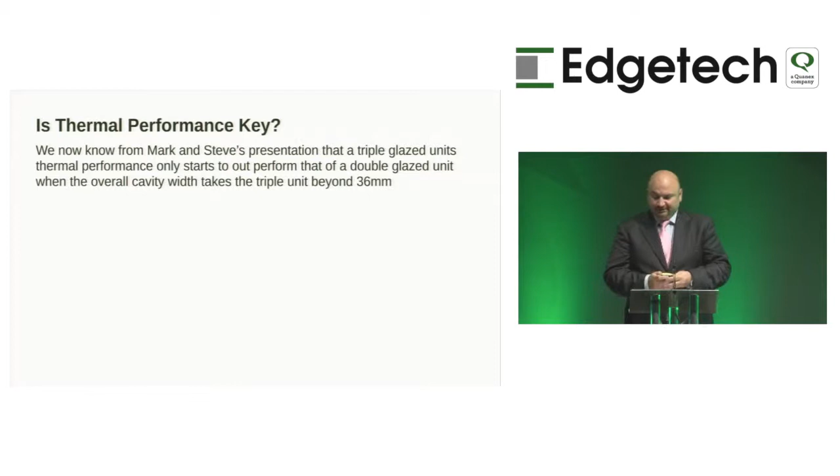Balance in the window industry, I've never heard of it. So is thermal performance key? We now know from Mark and Steve's presentation that a triple glazed unit's thermal performance only starts to outperform that of a double glazed unit when the overall cavity width takes the triple unit beyond 36mm. Apologies to those guys because I've nicked their slides.

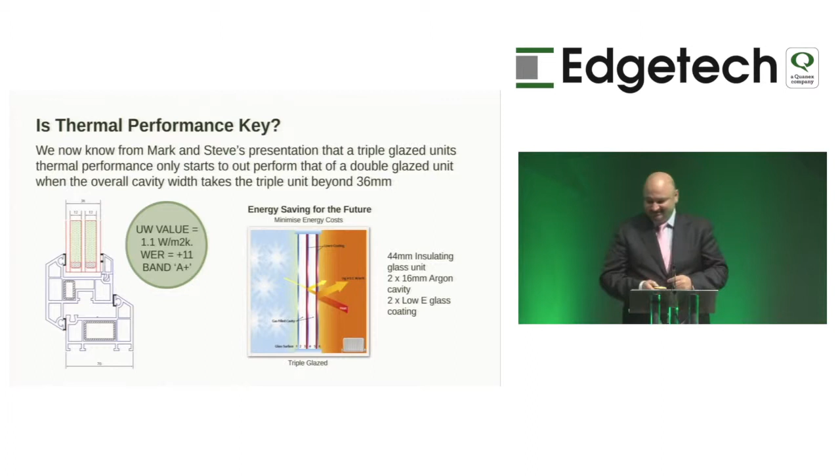Preparation - what do manufacturers of windows have to face when considering triple glazed units? For triple glazed units less than 36mm, virtually no extra consideration has to be given to the manufacturing of windows, frames and sashes. However, there will be some consistent themes that you've heard today, which I'll go through in my presentation, and I'm sure Steve will pick up on when we consider some of the implications.

For triple glazed units more than 36mm, at this point 70mm suites, as Mark alluded to, become impractical to hold a 36mm plus triple glazed unit due to space constraints and the placement of the glazing beads.

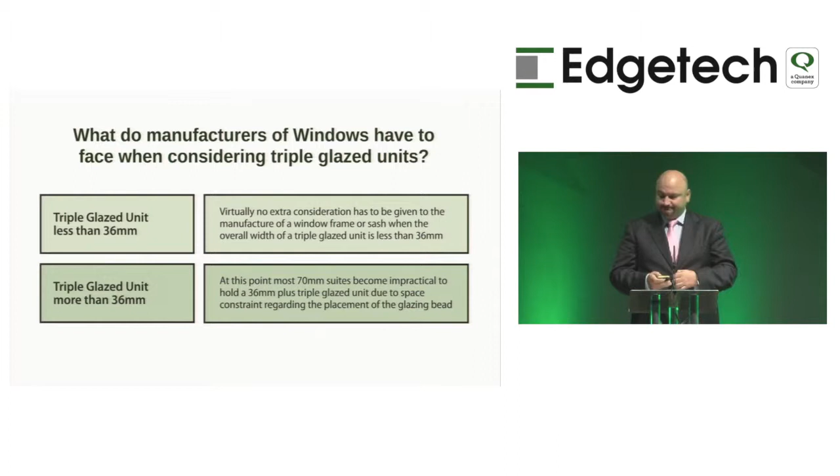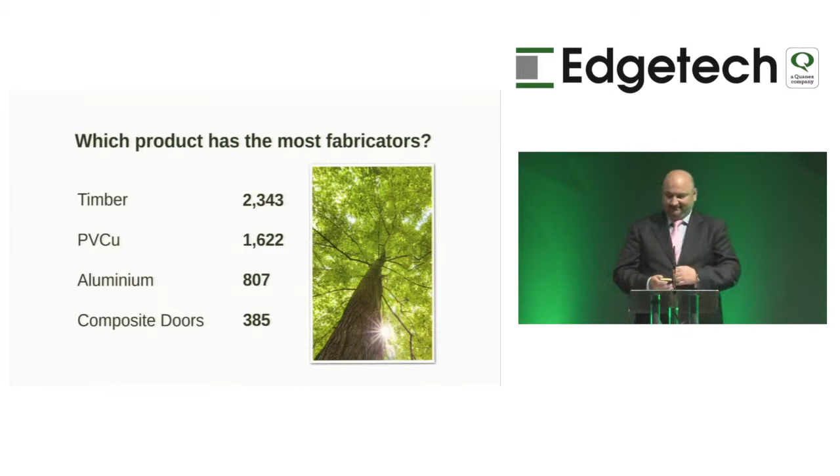Which product has the most fabricators in the UK? Believe it or not, timber. There are more fabricators of timber windows by number than any other sector, but clearly PVCU takes the lion's share, then aluminium and composite doors. I have to thank Mr. Scott for that information, although he didn't actually allow me to use it.

The impacts on production for PVC window production: multiple production lines will be required if we're considering moving beyond 70mm suites, and multiple production lines may be a requirement. Additional wear is common, a theme considering stock and storage. Saws will require additional profile-related supports, and routing machines will need constant height adjustment, so there may be a requirement for multiple lines for routing.

Most welding and cleaning lines can deal with 90mm suites, although in most cases retooling and new support blocks will be required. Extra reinforcement is a strong possibility throughout, as there's a requirement to support the extra weight through hinge points and friction stays. Hardware upgrades are being developed, so multiple stock, extra cost, and reconfiguration of production processes all need to be accounted for. Whilst many PVC systems can accommodate up to 36mm units with a dedicated glazing bead, to achieve up to 48mm triple requires a smart sash of circa 74mm.

Thank you for that, Duncan.

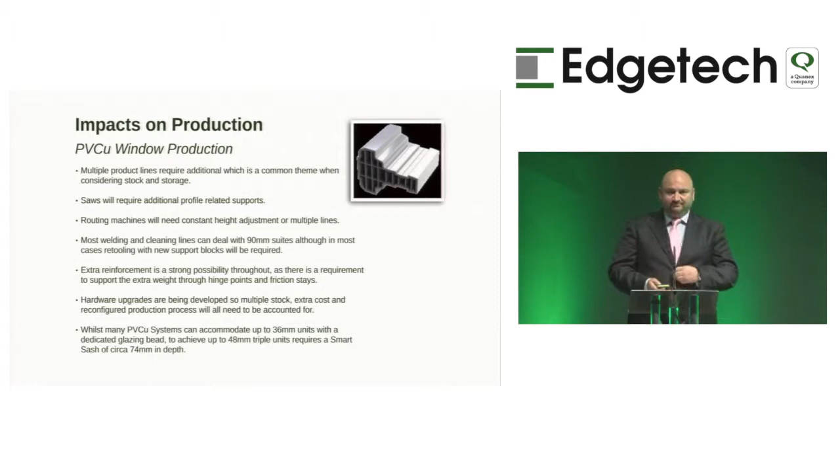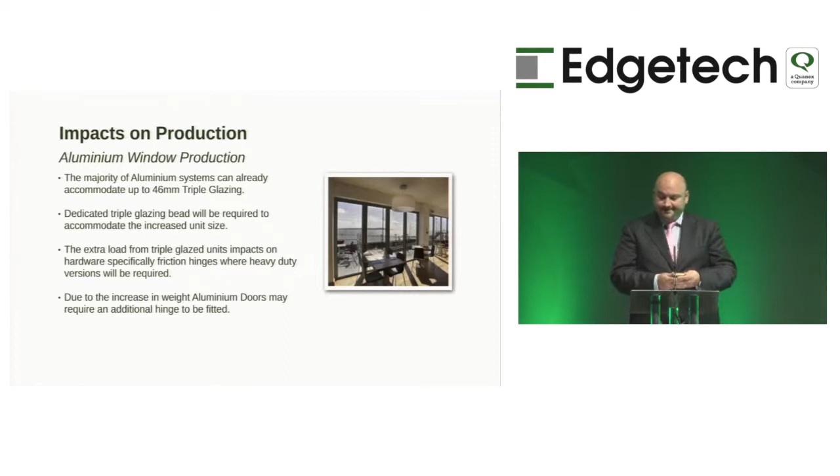The impacts on production for aluminium windows: the majority of aluminium systems can already accommodate up to 46mm triple glazing. Dedicated triple glazing beads will be required to accommodate the increase in unit size, and the extra load from triple glazing will have an impact on the hardware specification. Heavy duty friction hinges will be required, and due to the increase in weight, aluminium doors may require an additional hinge to be fitted.

The impacts on timber production - one of the things that surprised me is that the majority of timber triple glazed windows at this time are currently manufactured outside of the UK. That might be from Southern Ireland or the continent of Europe, but given the information we've already seen, there's probably not that many timber manufacturers of windows in the room, so this could be an opportunity.

Additional stock holding impacts on timber sections, which need good structural strength and low thermal conductivity for triple glazed products. There's a requirement for heavy duty friction hinges to accommodate the extra weight, typically over 30 kilograms per metre squared. A timber window designed to take a 40mm unit would need to be 90mm in depth, considerably adding to the overall weight of the product. To enhance the U value, two compression gaskets are required, and there are some milling variants required within the timber frame manufacturing process.

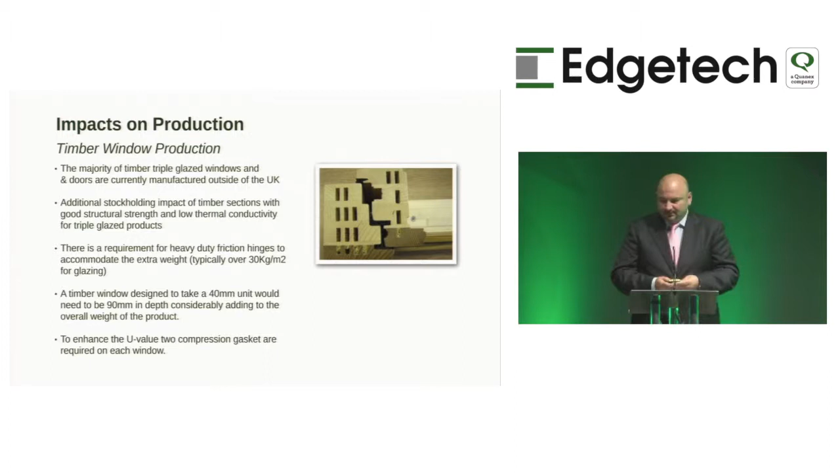The impact on doors or door manufacturing: the majority of existing composite door cassettes can already accommodate triple glazed units using an overall 24mm unit. Heavy duty door hinges accommodate up to 60 to 80 kilograms, so can cope with the extra weight that triple glazing poses. Patio and bifold doors are all about weight.

Heavy duty gearing is necessary for triple glazing, plus dedicated glazing beads, as previously mentioned. Existing aluminium systems can accommodate up to 46mm units, whereas normal PVC patio and bifold doors accommodate 40mm. PVC patios only take up to 28mm units, so would currently not accommodate a thermally beneficial triple glazed unit.

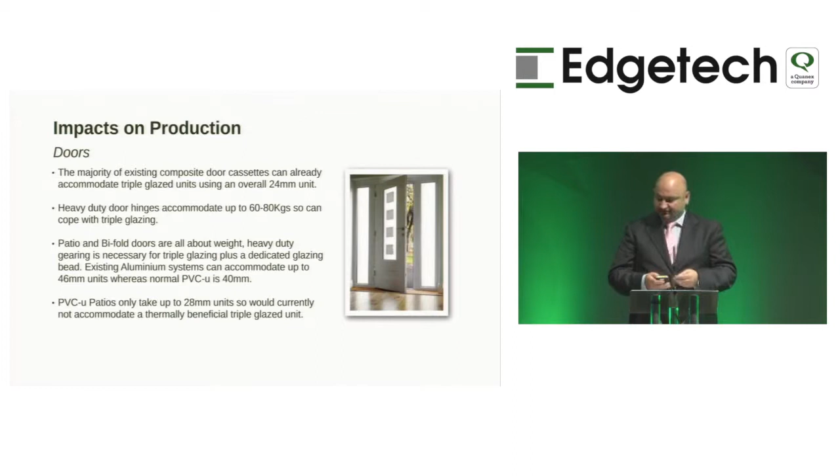So the impacts on production, glazing and logistics - as I said, the common theme here is probably cost, weight and production control. Triple glazing is obviously heavier than double glazing.

Mark alluded to the fact that if we go to 90mm suites, there's a 20% increase in the plastic, so a 20% increase in the weight. Safe working loads have to be respected through health and safety legislation, so the handling equipment that you would require,

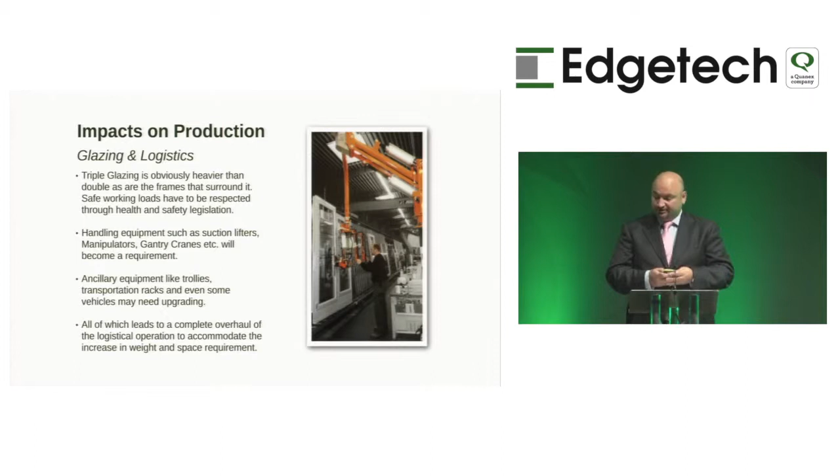lifters, suction lifters, manipulators, gantry cranes, etc., become a requirement. Ancillary equipment like trolleys, transportation racks and even vehicles may need upgrading, all of which leads to a complete overhaul of the logistics operations, just to accommodate the increase in weight and space requirement.

The impacts regarding production software: cutting and machining centres will need reprogramming for different suites of profile. New output files will be required for certain machining preps. Corner cleaners will need reprogramming. Programming to incorporate triple glazing bead will be required. Production software will need reconfiguring to accommodate multiple product lines where systems have a specific range of triple glazing.

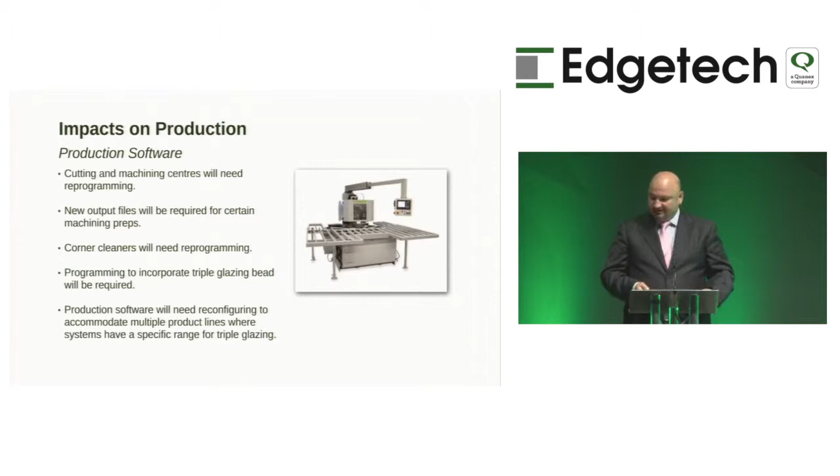So in conclusion, overall cavity width, I believe, is a major consideration and the impact it has on the production of windows and doors. If the overall cavity size stays relatively passive, then the impact can be reduced to just handling. However, if the need to move to wider profiles becomes necessary, then the accommodation could have substantial impacts on production and cost.

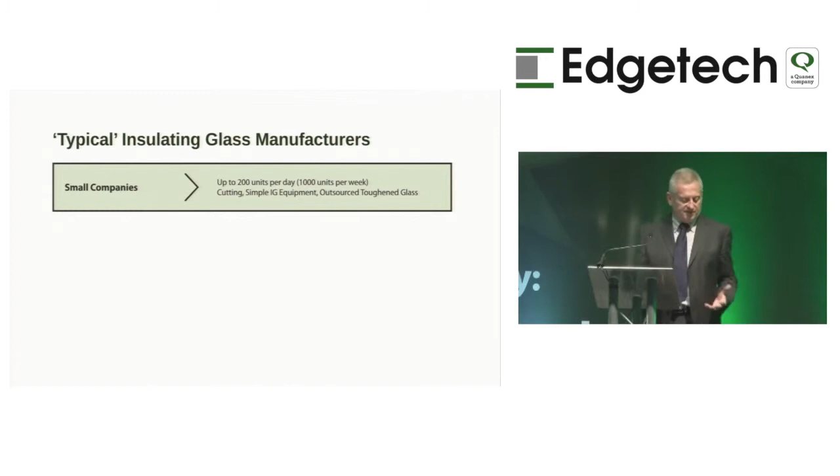I just want to try and explain typically what the glass companies are, so it's mostly by output. A small company, say up to 200 sealed units a day, some form of cutting, probably free-fall, simple IG line, and outsourced toughened glass.

Medium-sized companies will say up to 800 sealed units a day, probably still free-fall cutting, may have auto-loading, definitely have an IG line, possibly their own toughening plant, but may well still buy in external toughened.

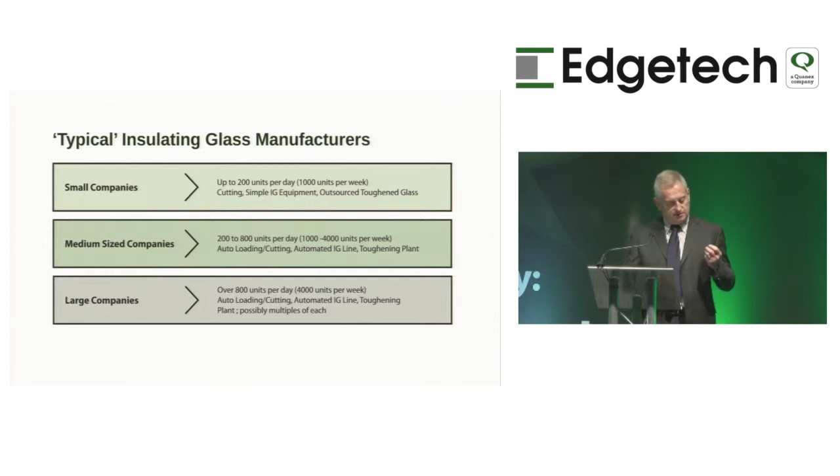The large companies, they will have auto-loading almost definitely, IG line, toughening plant, but probably multiples of each. They can all make triple units and have all got different challenges.

Typical changes - the first item is actually not to do with production, it's just that you will have to purchase more raw materials, and more importantly, you're going to have to give higher credit to your customers. Not easy after a recession.

Triple glazed units require higher accuracy. Cutting tables will have to cut square and accurate. Spacer saws will have to cut accurate to size, no burrs. The corner keys will have to fit, because what you can get away with a double glazed sealed unit, you cannot get away with a triple glazed sealed unit.

Again, even with triple units, you've got to make the same amount of sealed units a day. You'll see the effect on IG lines a little bit later. You will have faults in glass, you will have to make remakes. The law of probability says you will make more remakes, but if you only make the same remakes, they're going to be more expensive. So big effect on profitability.

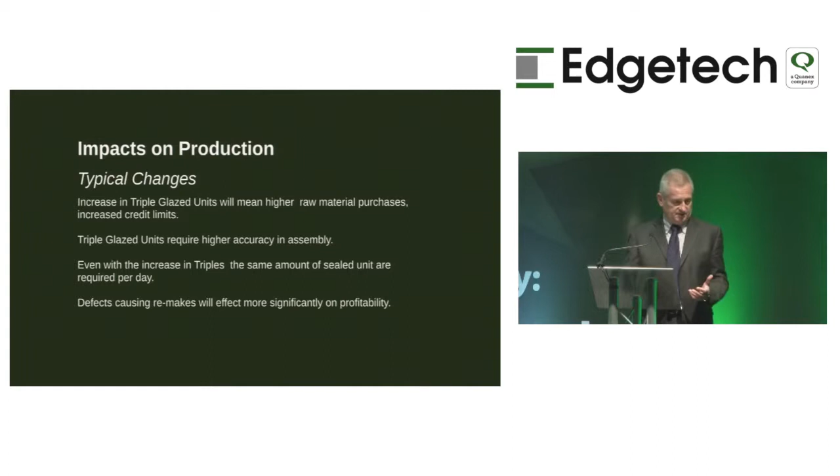Glass storage. As I said, document L was the first time we ended up with two different products, and progressively there's been more and more product types coming onto the market. These products need a bigger space to store.

You're constantly changing glass types, and if we cut triples, we're going to be cutting 50% more glass. We're taking it to the nth degree, and we're not going to go 100% overnight. It's going to be progressive, but the biggest problem in 95% of glass companies in this country is there is no space. Most of the time we can't even get the machines in the building, let alone find room for more glass and things like that.

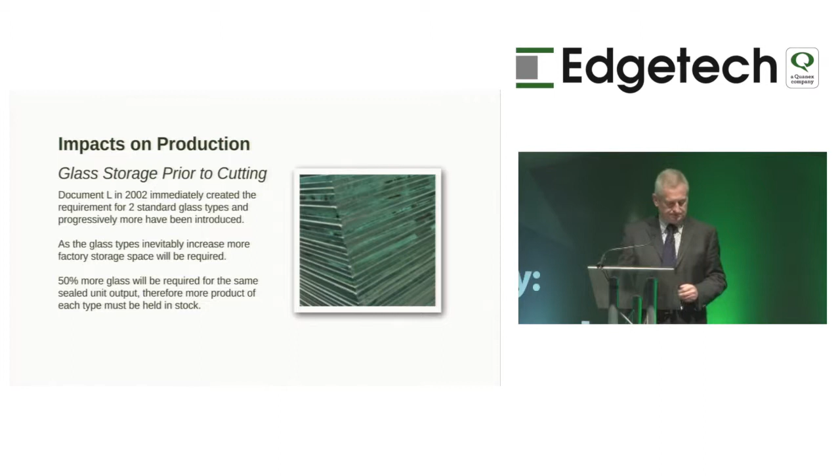Glass cutting. We have moved to a wider range of products, which means there are more runs of glass per day. When you have more runs of glass per day, you have less output. As we increase the number of different products, we will also affect the yield. If we have bigger batches, the better, but we've got lots of smaller batches instead, and smaller batches will affect the yield on glass types.

Surface sensitive glass. Triples, we now agree, will have two products that are surface sensitive, which need edge deletion. Edge deletion is already a slower process. Introducing the third piece of glass with edge deletion is going to slow the process even more. And remember, we have to make the same amount of sealed units a day. It's the thing you have to keep stressing.

50% more glass will be required to be stored per day if we go to 100% triples. More racks will be required to put the glass on, and more space required for work in progress.

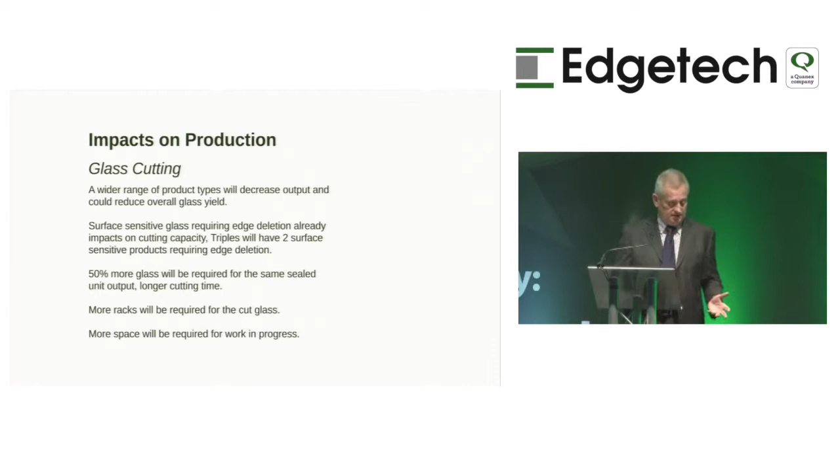Let's assume that the centre pane is going to be toughened. Currently, roughly 50% of all sealed units are currently toughened. So if we go to 100% triple, we're going to need a 100% increase in toughened glass. Well, that'll be a miracle if we can do that. So that's a big problem. You're going to need more glass to be stored on more racks and more work in progress. And most toughening furnaces now, you can't move around it.

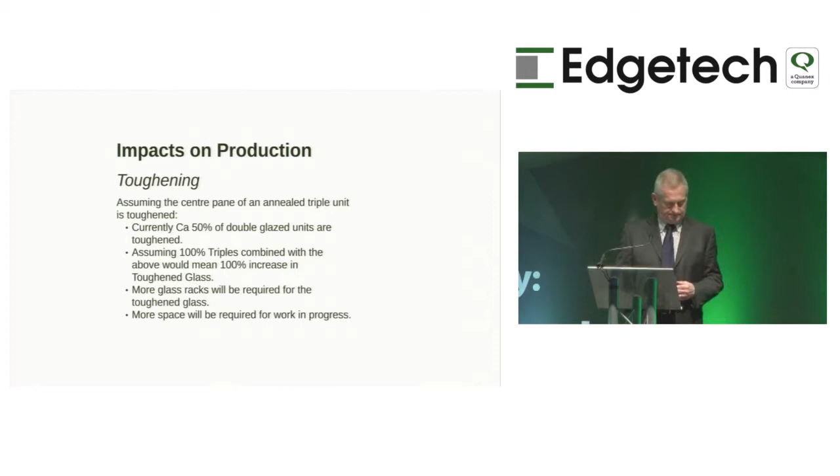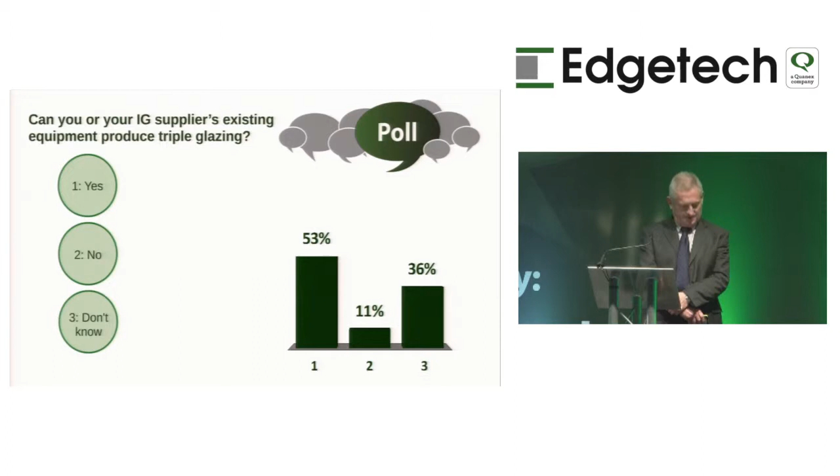Pardon. Can your IG line, existing, or your IG exist? Can your existing equipment produce triple units? That's easier, yes or no? Start now, do I have to press? Yeah. Press now. Oh, it's going. Could 11% put their hands up and I'll come and see them next week? Wait, we will come and see them next week on alternate days.

Insulating glass lines. As we described the companies before, they'll all be able to make triple units, but there'll be different effects. Generally, on a vertical sealed unit line, when you make triples, you're going to make at least 40% less in the same time that you're making doubles. Could be worse than that, depends on the line. The sealed units will be heavier, which is a health and safety problem. Getting them off the line, if you can't get them off quick enough, that again will affect your output.

So sucker lifting is probably going to be required. You're going to need more racks at the front and the end of the IG line and in dispatch. And conventional spacer will need twice as much work to make triple units. The only thing we're saving here is a piece of cheap float glass - nothing else. We're putting more expensive glass in, and there's a hell of a lot of work put into it.

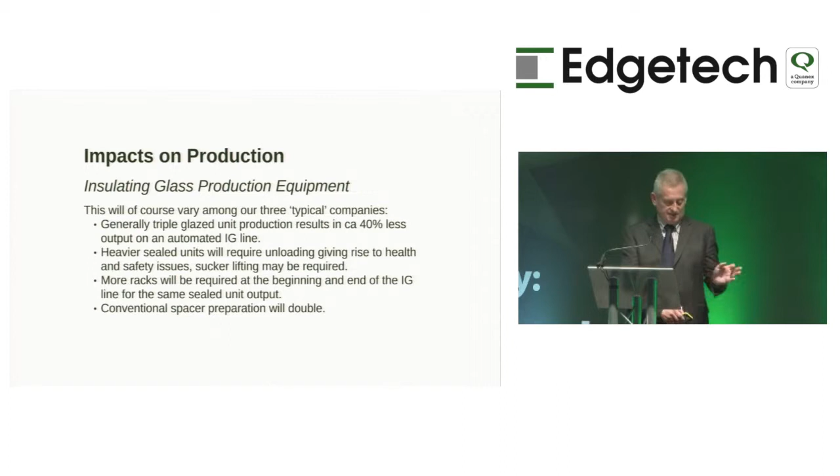Logistics. As we say, the sealed units are going to get heavier. You can see there roughly we go from 20 to 30 kilos, and this is a handleable size of glass. Once you get a big piece of glass, it's a big effect.

The problem we've got now is we probably overload vehicles at the moment, or have the tendency or the possibility to overload. That's not going to happen in the future. You're going to need more space, not load capacity. You're going to be delivering more air, basically. And I think when Gaby speaks, you can see there's some examples she's got of jobs they've done.

Summary of effects: glass and conventional spacers will require more accuracy. This is really important. Glass stock will be required at higher value. More glass cutting, longer working hours, there's no choice.

More toughened glass will be required, meaning longer working hours and buying more toughened glass. Is there sufficient glass to the market? There will be more complicated sealed unit production.

What I didn't mention was how complicated it is to actually cut two bits of float and put a piece of toughened in the middle. Don't underestimate how many times you're going to get that wrong. Malcolm will talk much more about how you flow that around the factory to get those two or three bits of glass together.

More internal racks will be required, more space will be needed, and there'll be problems with deliveries. You will have to deliver a lot more times to the same customers.

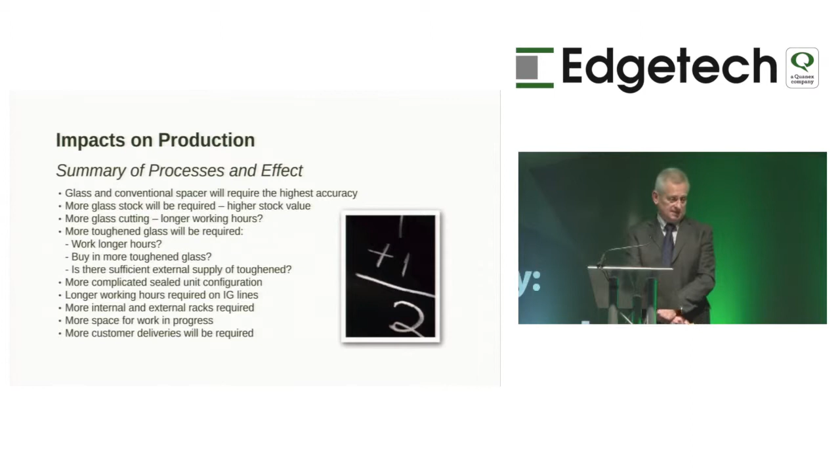In my conclusion, I did have it say slash wrists, sell the business, retire, but I decided to take that out. So you have to look at your current production, assess what impact there will be, and start planning now on processes and equipment, especially software. It's one of the most important things in the factory. And above all, after all we've talked about, get the right price for the product.

It's not just a piece of glass that's missing. It's a lot more than that.

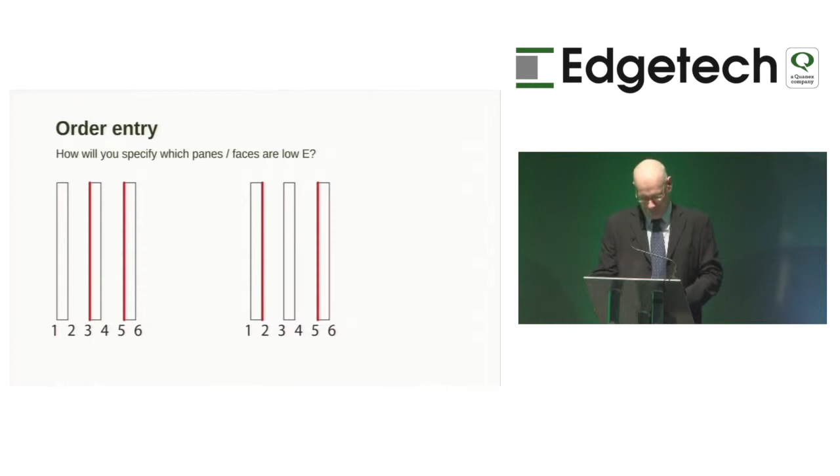Let's start with the basics. Can your software cope with specifying which pane is low-E, which face is low-E, and which pane is toughened? Might seem simple, don't think it is. It might seem trivial and unimportant, but once you get to a shaped unit or a stepped unit, it becomes crucial. You can't rely on the guys on the line sorting out orientation.

If you buy your toughened in, you've got exactly the same problem, but you've got to rely on somebody else getting it right.

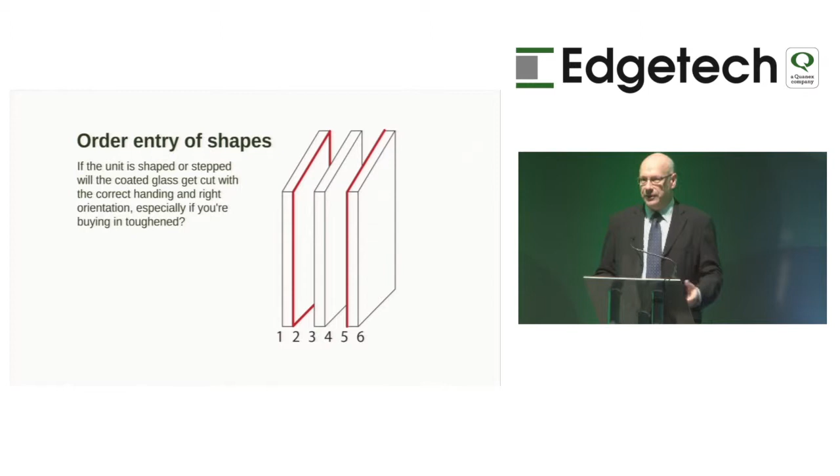That tricky toughened centre pane. I'm going to assume for sake of argument that you are going to toughen the centre pane, otherwise you haven't really got a problem. If you toughen in-house, you need to cut it, get it arrissed, toughened, and back in time to meet up with its partner pieces, which isn't trivial. If you can, you don't want to do a separate batch for your triple, because that's going to reduce your yield. You should try and integrate it in your current batch.

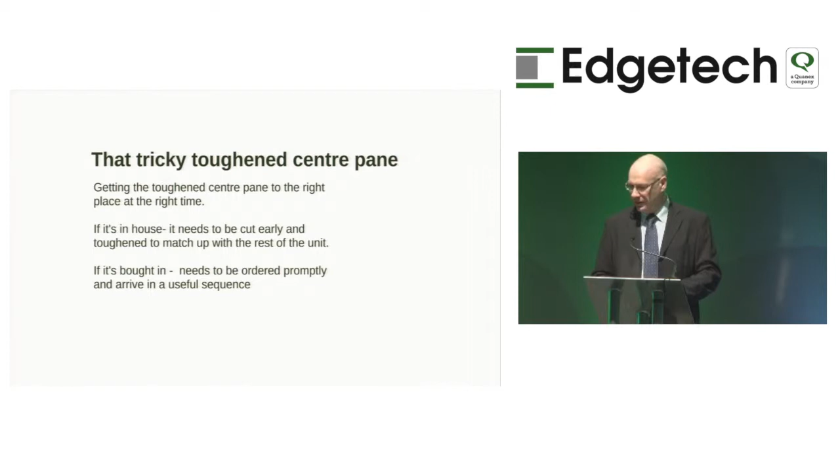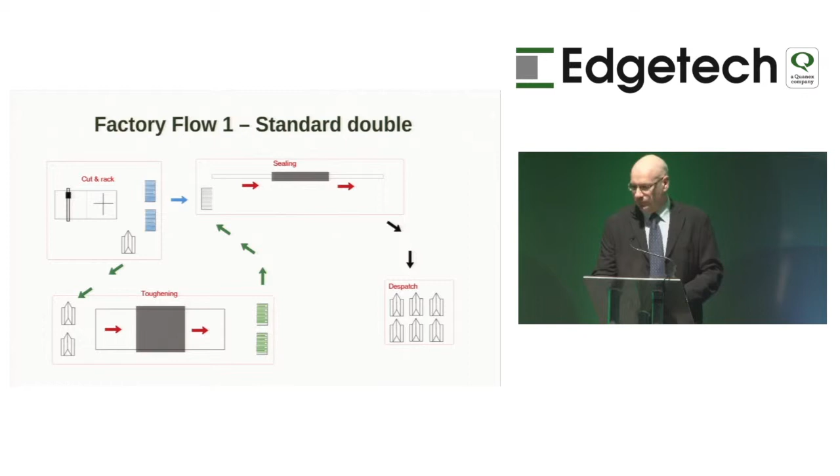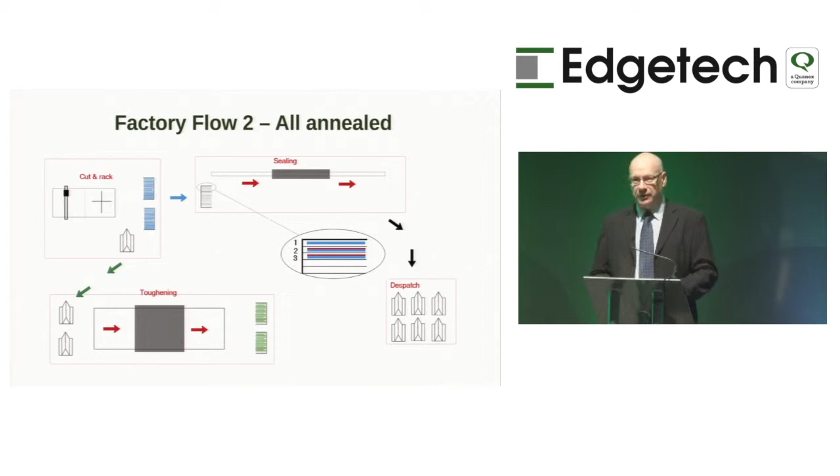If you're making a totally annealed unit, then the flow is pretty straightforward. The blue arrow there just goes from cutting straight to sealing, no real problems. If you're making a totally toughened unit, again the green arrows show cut it, rack it, toughen it, and it flows back.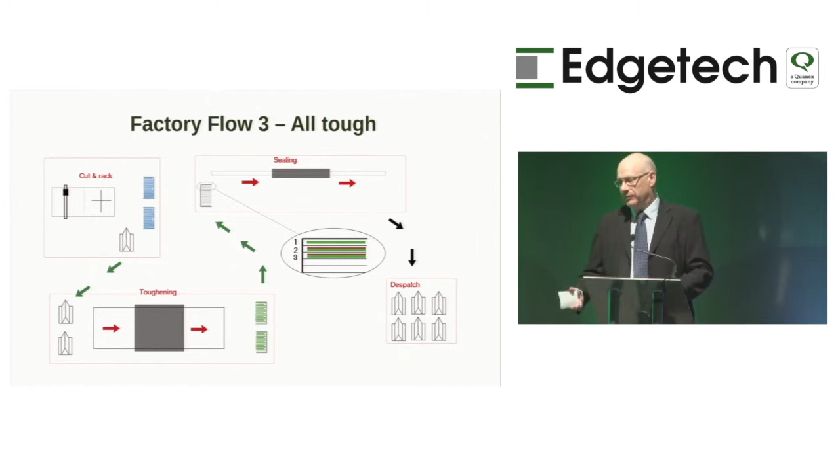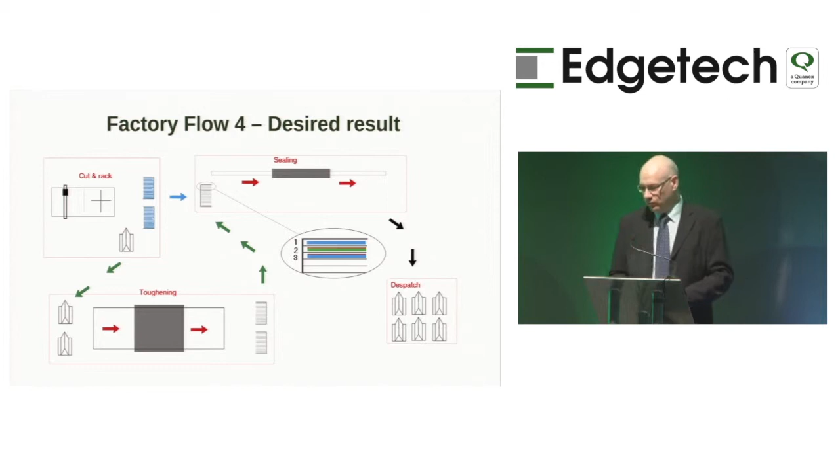But what we want is a toughened unit, a toughened piece in the middle, and two bits of float either side. Those of you who already make combination units have got experience in this, and I don't wish to teach my betters how to suck eggs, but this is one of the options.

The blue arrows there show you could leave a gap in your trolley, have two bits of float, and leave a gap in the middle for your toughened, then wheel that trolley to the back of the furnace, put the piece of toughened in, and wheel it to the line. The problem is you've got lots of half-empty slot carts running around the factory, and you might have a log jam at the back of your furnace. The advantage is everything is in the right place and orientation when you get it to the line.

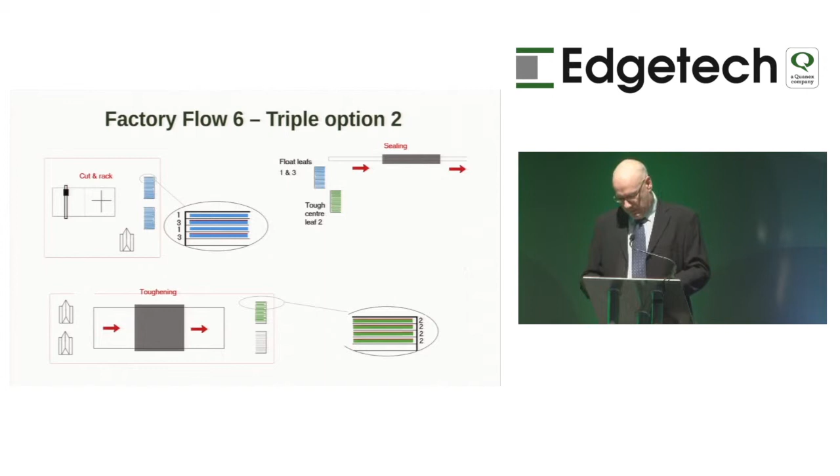Another way is to put pieces one and three concatenated in the float trolley where the blue arrows go, and put the centre pieces in a trolley at the back of the furnace, and the two trolleys meet. The problem is the guy at sealing needs to have his wits about him to get all the pieces from alternate trolleys. The advantage is you've got no half-full trolleys around the factory. So neither are ideal scenarios.

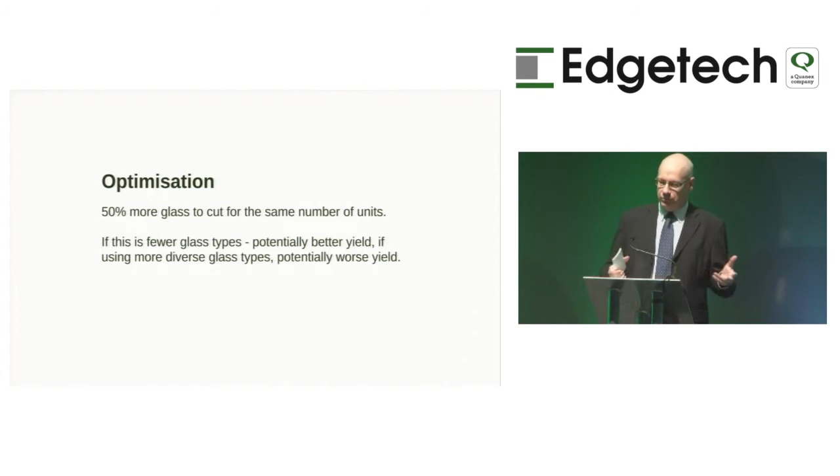One possible benefit of triple is that you might have bigger batches if you've got similar glass types, but if you've got more varied glass types, which is more probable, maybe a low iron, maybe an anti-condensation glass, your yield might suffer. So again, not ideal.

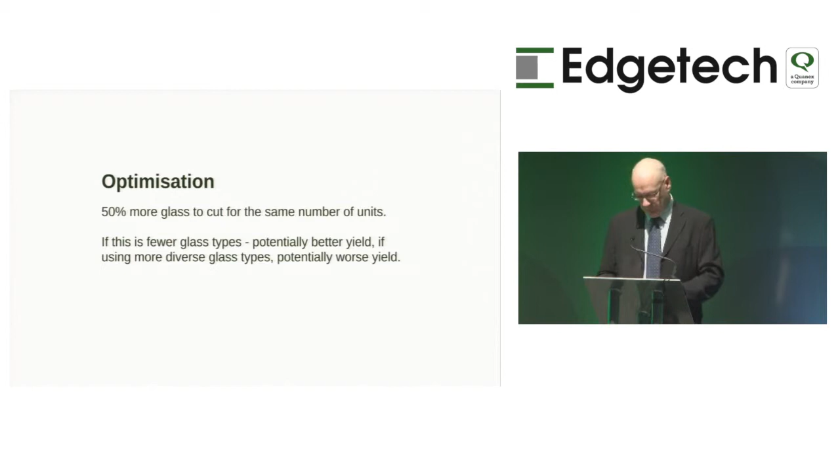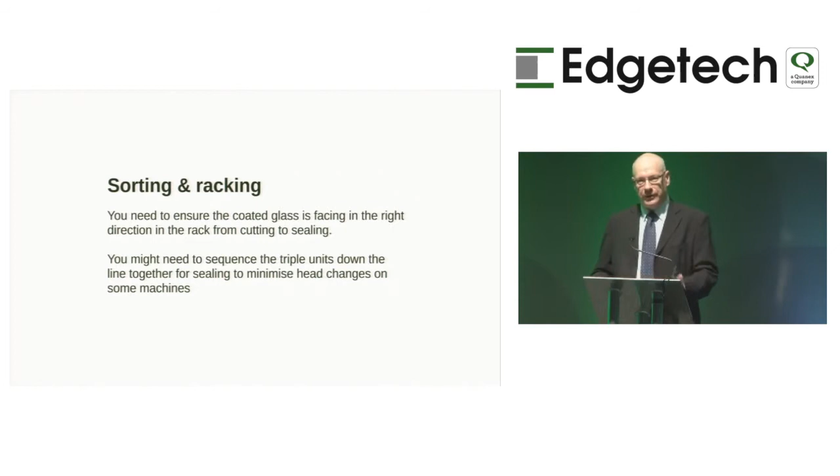However you choose to make your triple glazed units, you probably need to give some thought to sorting and racking. You probably want to make all of your triples together in one place, depending on the capacity and constraints of your sealing line, especially if your cavities are different, because that's going to give you a major headache.

Obviously it's not an easy thing to mix triple in with double in this kind of scenario, and you could probably do with some help from capacity planning production software to show, if we get an order for 150 triple glaze units tomorrow out of the blue, what's that going to do to our capacity? Most software has that kind of stuff in it.

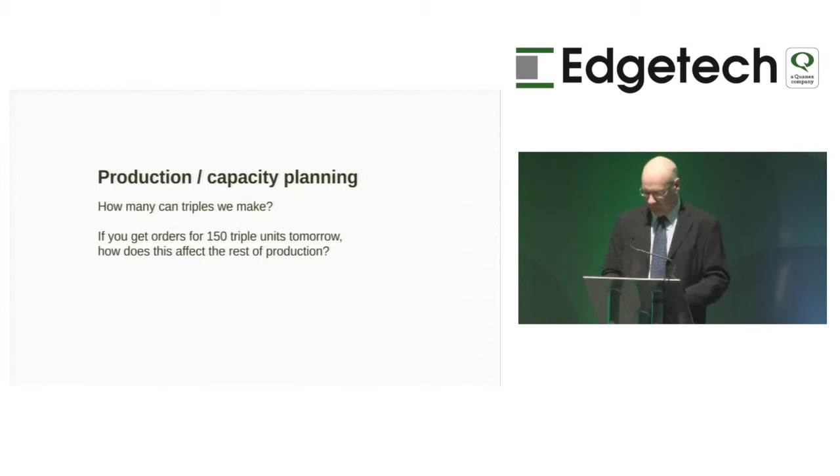What I would suggest is you talk to your current software provider. I think all of the UK software out there being sold at the moment can cope with triples adequately. If you've got older DOS legacy products, then you need to be looking at upgrading, I would think. But making a phone call to your software guys would be no harm at all - there's enough challenges without making your software one of the problems.

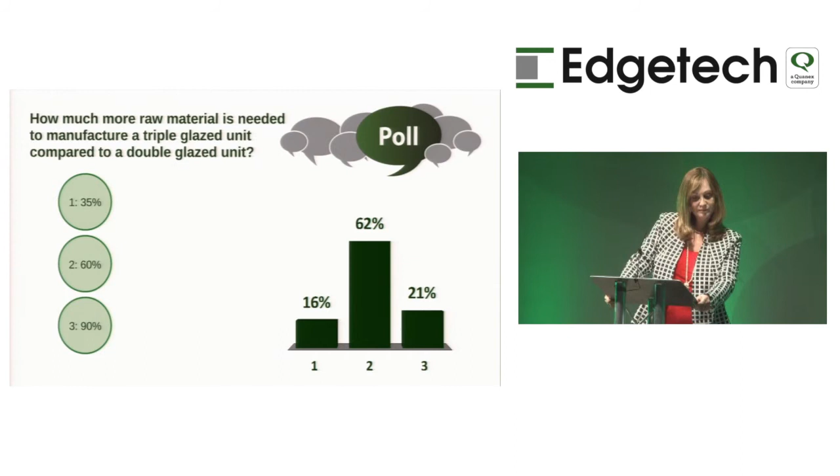That's interesting, because based on cavity width - which they do alter in our industry - it's actually 90%, because you are just one sheet of glass away from making 2 units, remember. If you imagine you take a 24mm double glazed unit and you then make a 44mm triple glazed unit, you're actually adding 90% more in raw materials. But you'd be surprised how many people think it's just a third extra.

So how will this impact on our business? Well, the necessity to purchase much bigger volumes of raw materials will either mean increase in stock holding areas or probably more frequent daily deliveries, with the disruption that incurs. Bigger credit limits will be needed with our suppliers.

So you can see now from the screen the huge increases in the components we will require - 50% glass increase, well that's an obvious fact, but that extra leaf is in fact the higher value product, which is a coated glass, very often soft coat, and 100% approximately on all other components: spacer bar, corner keys, desiccant, gas, primary and secondary sealant. Again, the figures are approximate based on cavity width.

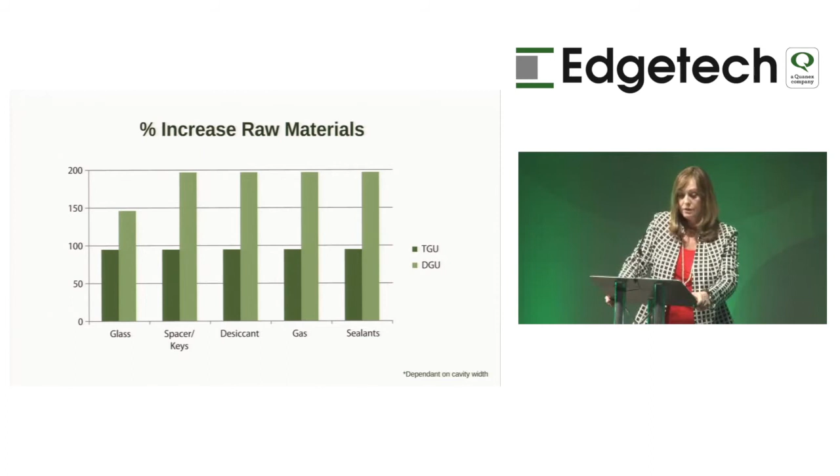And then we've got to deal with the extra manufacturing time - 50% more racking required after the additional cutting. More racks, more space, 100% more space for production and desiccant filling, gas, primary and secondary sealant. 60% more storage will be needed in dispatch, based on a 44mm IGU.

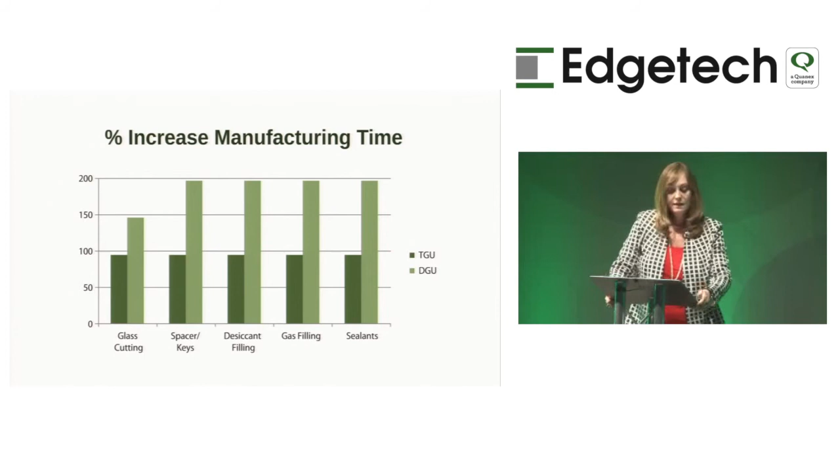Then we come to the real killer. The example on screen is based on a customer last week who had approximately 100 28mm double glazed units weighing 980 kilos approximately. They were delivered on a typical 1200 kilo payload sprinter type vehicle. If you manufacture those as 44mm triple glazing with 3 leaves of 4mm, they would weigh approximately 1500 kilos.

To illustrate that further, stack the 100 double glazed units back to back with transport pads - 3100 long. Stack 100 44mm units in line and they would be 4700 long. To really push that home to you and the weight increase, on screen you'll see a typical example of a bifold patio door, size 800 by 2100. DGU, 2 bits of 4mm, approximately 33 kilos. TGU with 3 leaves of 4mm, a whopping 50.4 kilos approximately.

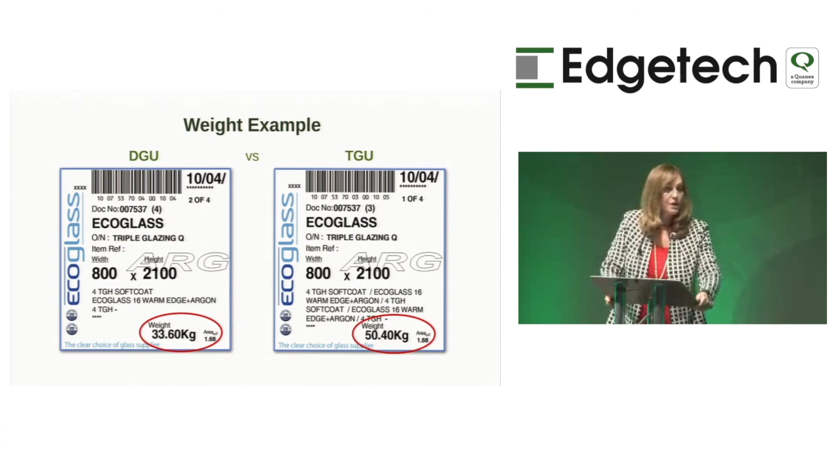So we, as a manufacturer, are therefore faced with the prospect of increased labour, raw materials, plant, manufacturing time, logistics, finances, health and safety issues, amongst other things. Over the last 20 years I've seen many advances in the industry, but I believe this is the most fundamental game changer, the biggest impact being on the IGU producer.

I believe the industry will depend on IGU manufacturers like ourselves, and must recognise the need for accurate pricing of the end product. There must be enough profitability in the production of triple glazing to enable IGU manufacturers to cope with the supply and demand they will face.

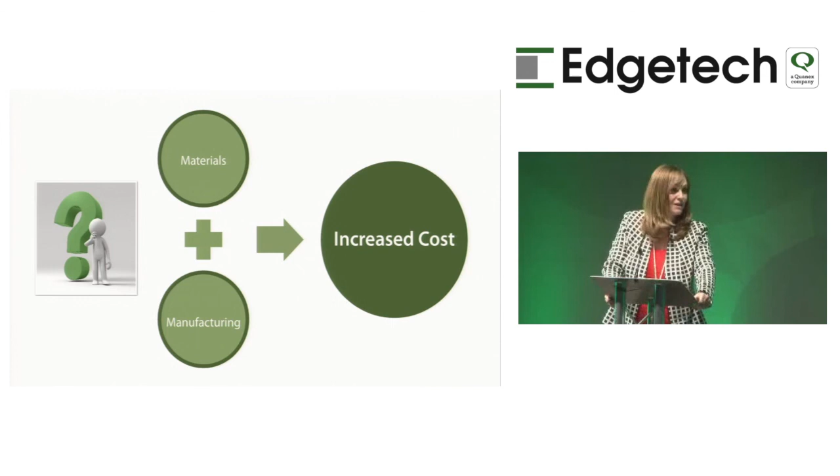Using the triple glazing banner as a lead generator is fine, if it doesn't undermine and undervalue the product. Ecoglass are ready to embrace any new product that benefits our customers, and triple glazing is one. But extended lead times and increased prices on product have to be a reality that's accepted. Order triple for a reason, and not for a buzzword.